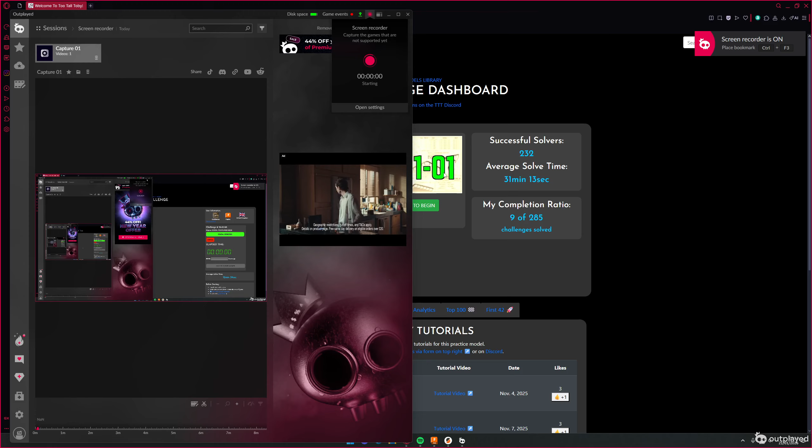Okay, this is my attempt at a tutorial, if it ever decides to load, for this part. Alright, I think I'm gonna start by modelling one side, mirror it over. I'm gonna start by doing this rail, then I'm going to do these tubes.

So I think this model was actually a tournament model, and I did try and do it a while ago, but I didn't get it right. So it says no Ivan exploits, which I don't think are allowed on leaderboard models or practice models anyway. But yeah, I'm going to start by modelling this line here.

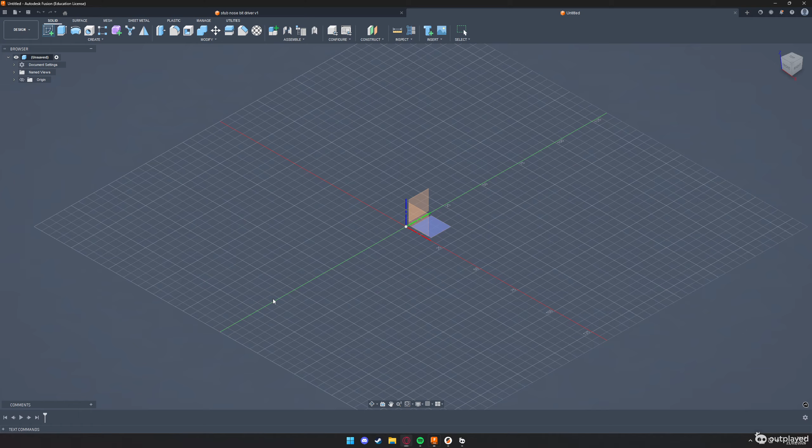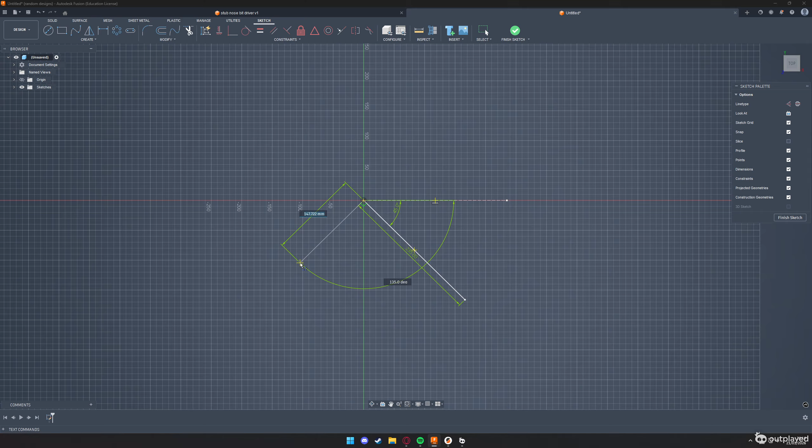So I start just having a line, and yep, that's 45 degrees from the centre, so it's going to be 45 degrees, and it is 235 long. 235. There we go. Now I can add another one at 90 degrees and add a fillet between here and here. And that fillet should be 26 because I'm modelling the outside diameter first.

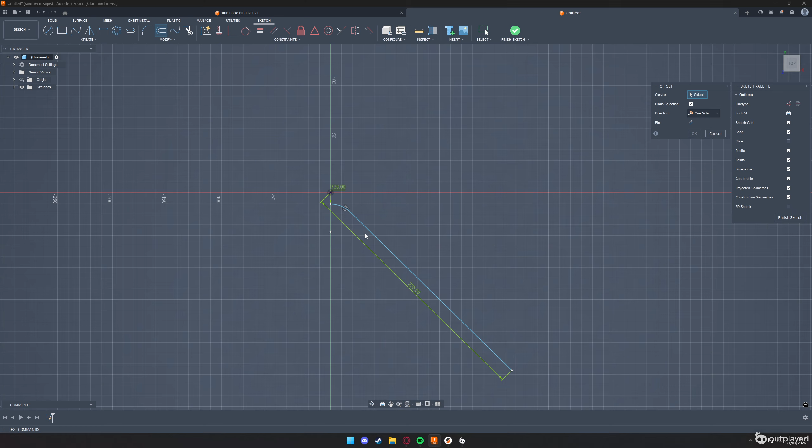Now I can make a line down here and just cut off all of this dirty stuff there. Right, that's the centre point, that's not going to go, is it? Okay. Now I want to move in. How thick is this part? 6mm. So I'm going to use the offset tool and go in by 6. And I'm going to close up this end and this end. This should be the sketch of this part modelled.

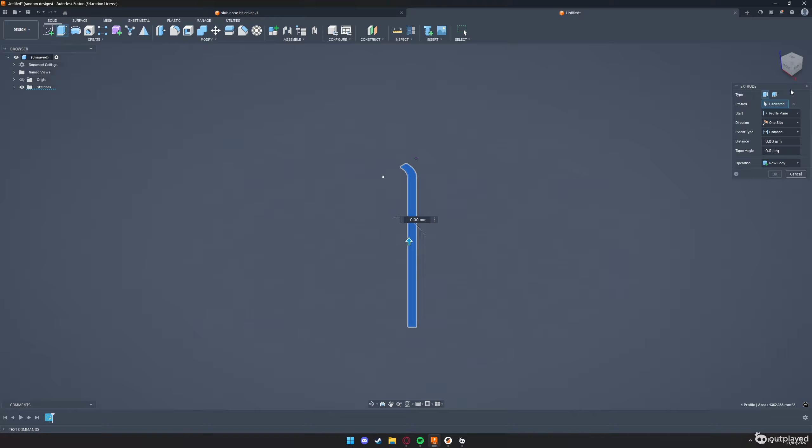I can now extrude this up. I don't like that about this model. The hole is directly in line with it. So how far up does that go? That goes up 10mm. Next I'm going to work on, I think, this bevel. It says there's a small flat spot here.

So the bevel, is it a bevel or the radius, whatever it is, I want to find out this point. It's a tangent from there, so it must be set slightly away. Where does it say what radius that is? There. So it's a 38mm radius. And does it say that it's set in? It's got to be set. No, it's got to be set out. 25. I'm going to assume that 25 is to the centre.

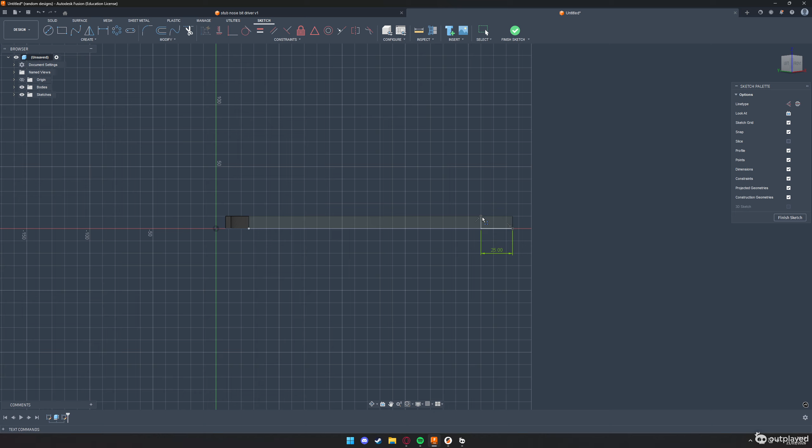So I'm going to create another sketch on there. We'll soon find out if that 25 is right. So 25 in. And then from the top of there, we want to go down. So 38 by 2 to give us the radius. Oh no, sorry, 38, because that is already a radius.

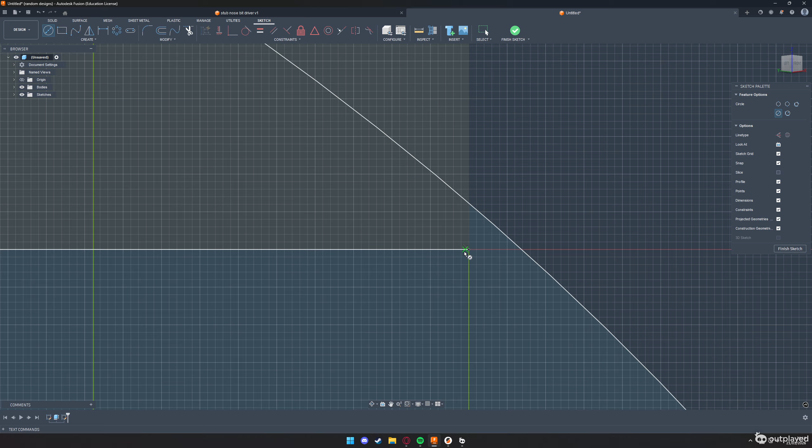I can go on to circle, and that should, yes, right, perfect. That gives us a little flat spot there, so I'm pretty sure that is correct. Don't want to go in, I want to go, well, what's happening there. There we go. Alright, now there are holes here and here. Expanded view here, so it's 4mm all the way through with a 45 degree chamfer and 8mm at the end. Although, yes, no Ivan exploits.

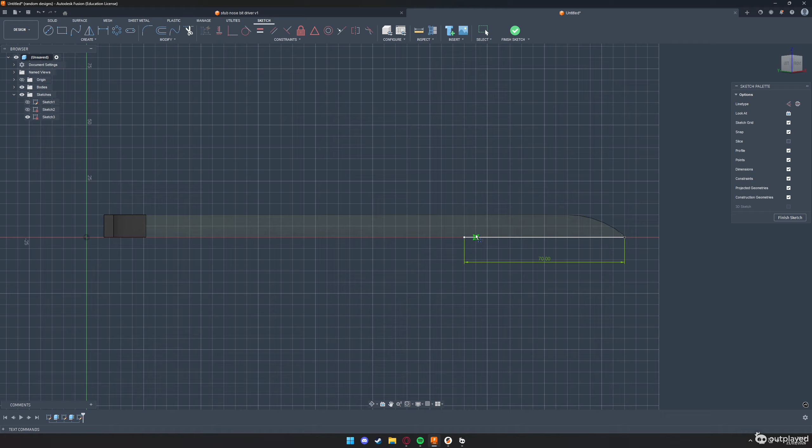So it gives us the dimension from the end, 70, and then between them is 70. So I can select a line, make that 70, and then I can select another line and make that another 70. You can see it already wants to snap to halfway, so I'm just going to do a circle at 4 millimeters diameter, and here a circle at 4 millimeters diameter.

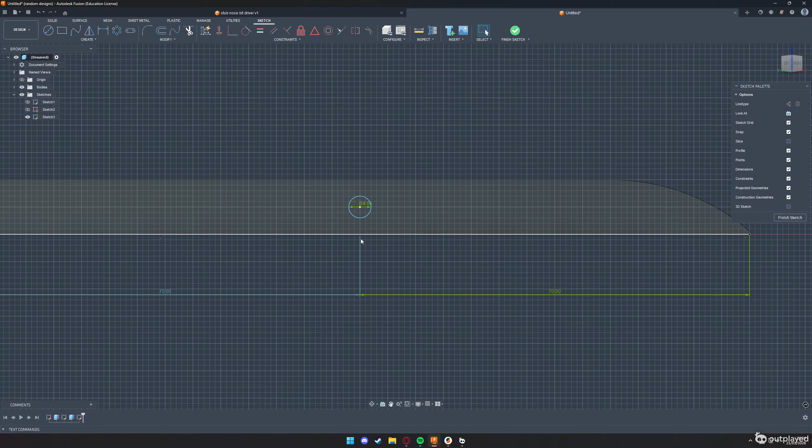To get it accurate, you want to draw a line up, but I can see where these two dimensions connect, and it's very clearly in the center. So select both of those, extrude them all the way through. Go back here, hide this sketch, and let's create a chamfer here. It automatically sets itself to 45 degrees, which would be 90 degrees between the two faces.

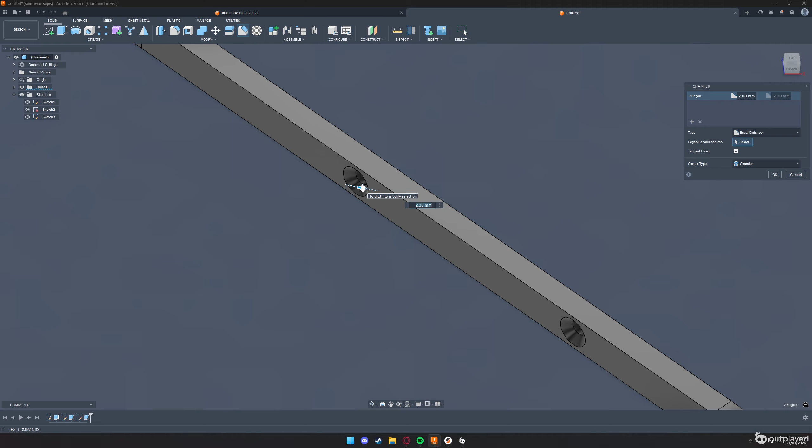And it's going from a 4mm hole to an 8 diameter. So 8 minus 4 is 4. Divided by 2, that's 2. So 2 is correct there. Now comes the hard part, which is actually making these, I don't know what to call them, the wires or rails between the things.

So we can see that it's from point to point here, not centre to centre, it's 22. From centre to centre it would be 22 plus the diameter of the wire, which is a 4mm diameter, 6 places, which are 6 wires, yep. So 26 from centre to centre.

So I'm going to start by setting up a plane on the bottom face at the center of this wire. Then I'm going to find how long the distance is between this part and this part on that plane. I'm then going to create a pattern using that spacing of 6, and I can then mirror them and it should be alright, I hope.

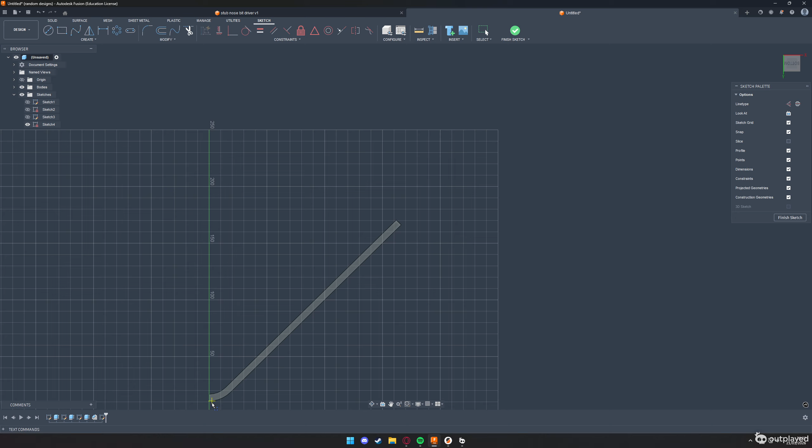So if I make a sketch on here, now it needs to tell me where at least one of these starts. Yes, so the 150 is from the very point of there to the outer edge of the first wire. So if I do 150, and then I want to go in for the 4mm wire, so I want to go in half the diameter of that, which is 2.

I can then go, yeah, that snapped. I want to go out all the way past there, so it intersects both of these lines. And it is halfway, isn't it? 2mm to wire center, and just check that is 6. Yeah, that is 6. So now I can draw another line, letting it snap on this point where these two lines intersect, and this point where these two lines intersect.

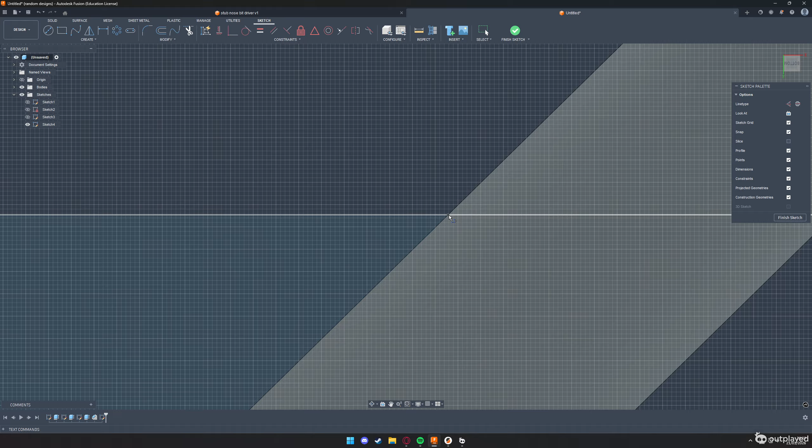Now I can do this because I'm sketching on this face. I can now make a circle here at 4mm diameter of the wire. Do I want to do that? Yes, I do.

So now I want to go down because it doesn't give me the dimension from here to here as this angle. It instead gives me from end to end 22. So I want to go down 26, which is 22 plus the 4mm. So 26mm down, make sure that snaps to 90.

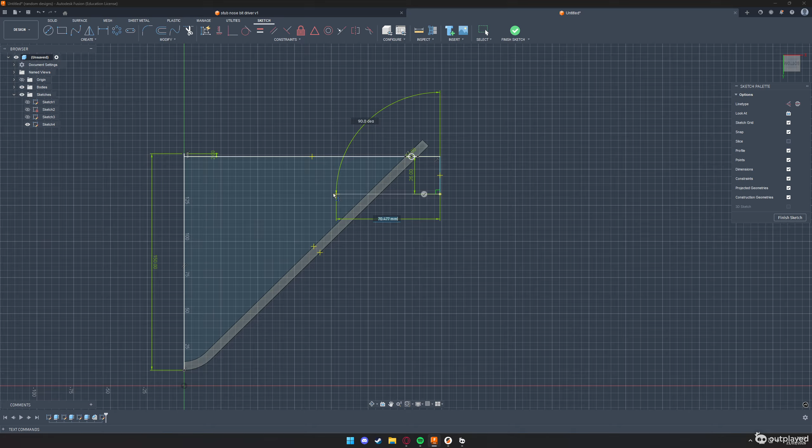And we're going to do the same again, letting it snap to the ends. And let's make a circle here of 4mm. It's snapping to the center of the intersect.

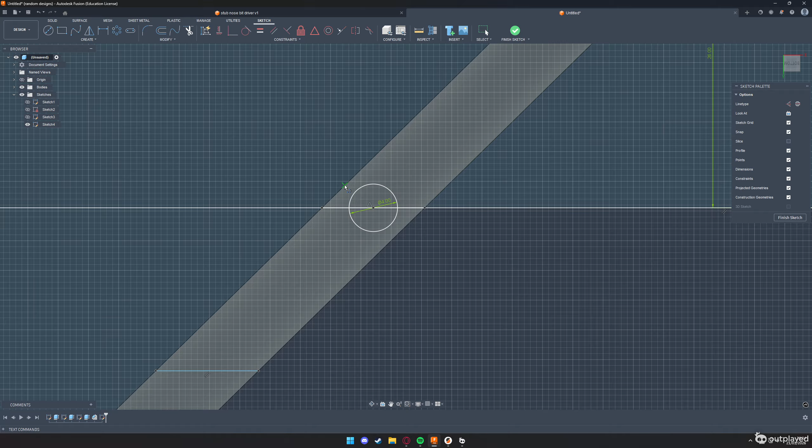Right, so the intersect that I've done automatically has a center point, which is identified by that triangle next to the cross. So the reason I'm doing these to intersect these two is to give me the center instead of trying to figure out a way of doing 2mm in, snapping it to 90, then doing 90 across again, which will give me the same centre. This is just a little bit quicker.

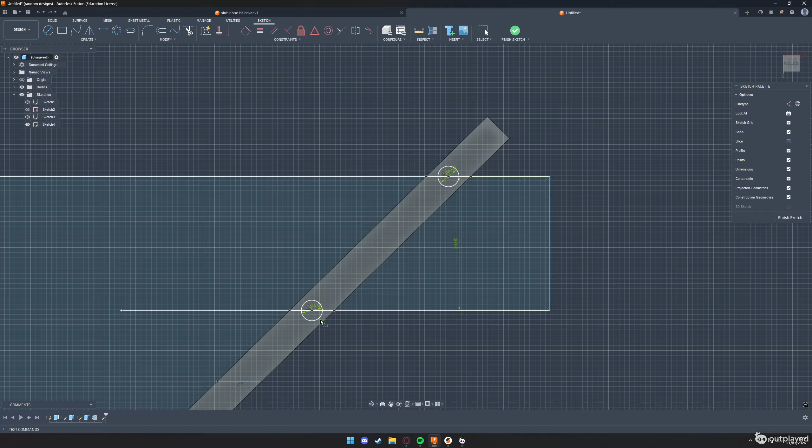Okay, so I can finish that now. Oh, I don't want to finish that sketch just yet because I want to copy the centre of the hole position.

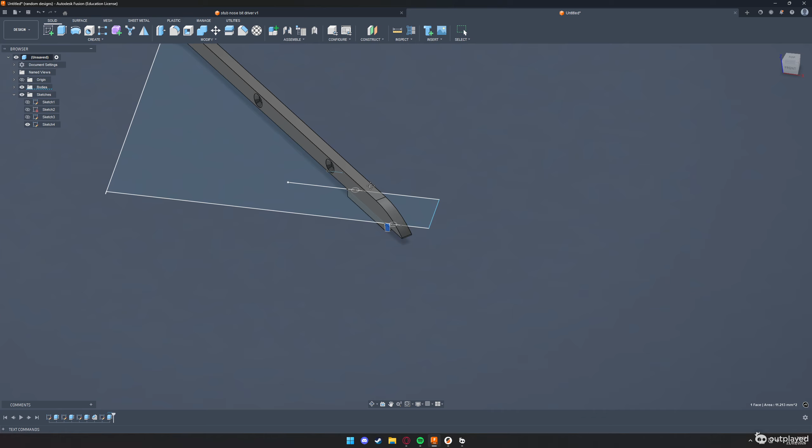36.770, copy that. Now if I extrude this down, I'm only extruding this to give me this face here, which is the starting point. I could do it as a plane moving from the back, but because my origin point is actually set at the intersect of this line and the line that would be going the other way, not on this point, 150 would be annoying to calculate.

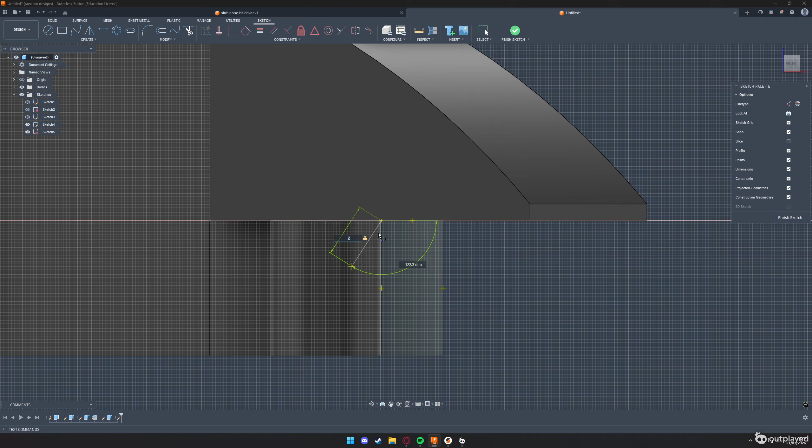So I can create a sketch on this plane. It's not going to want to snap to here, but that's fine, because I can simply go 2 in from the edge of this plane, which it does want to snap to. I can then go down. Where does it say how deep these are? Right, so they're down by 30.

Yep, and then I'm just going to go across all the way to the center point, which does want to snap.

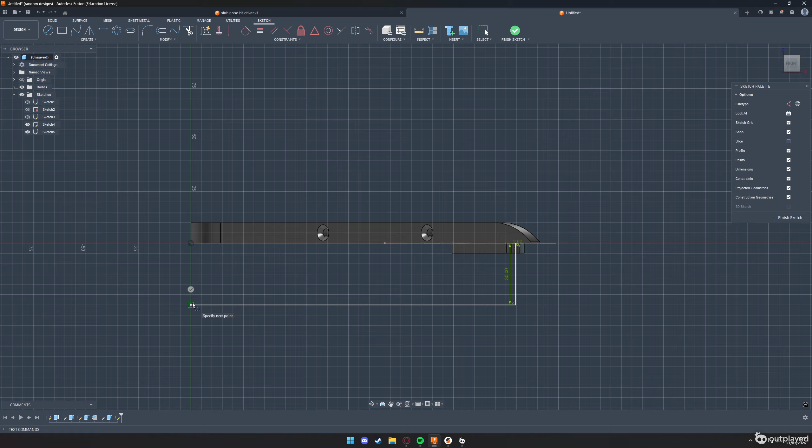I now want to produce a fillet here, and I want this fillet to be the center of this curve, not the inside or the outside. So the inside is 8 and the outside is 12, so halfway between that is 10. So I want this to be a 10mm fillet, or a 10mm radius fillet.

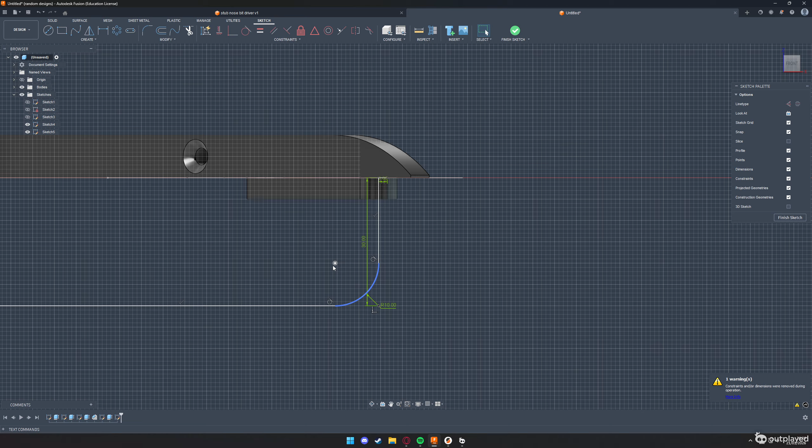That should give me, that looks about right, that should give me enough so I can finish this sketch. I can get rid of this plane, so just cut it away to this face.

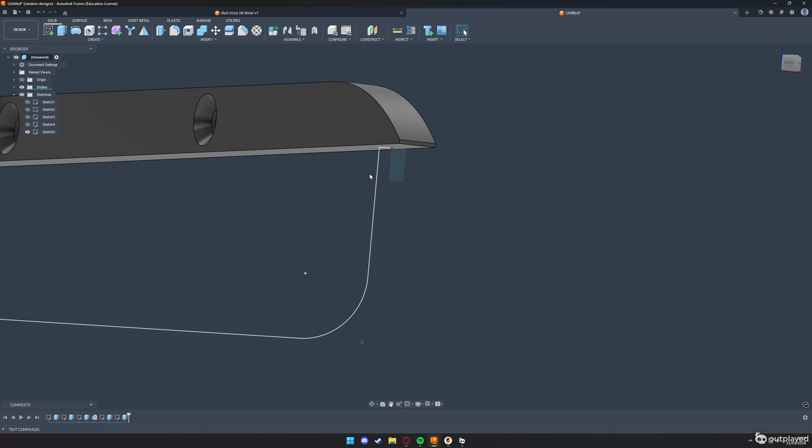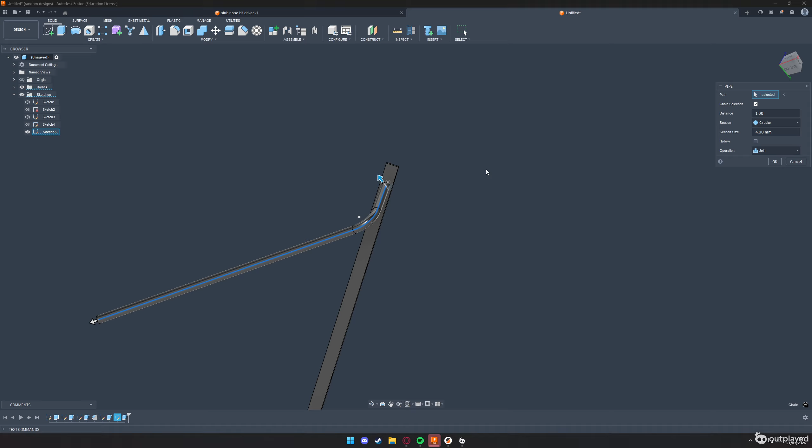Right, now I want to delete this little bit there, because when I make my pipe, that will automatically select. So make my pipe on here, that's already full, lovely. I want to make sure that it is a new body, because if you notice, the rails and the holder are not the same material. So new body and click OK.

This will also let me use a pattern, and I can select this whole body instead of having to select the individual faces.

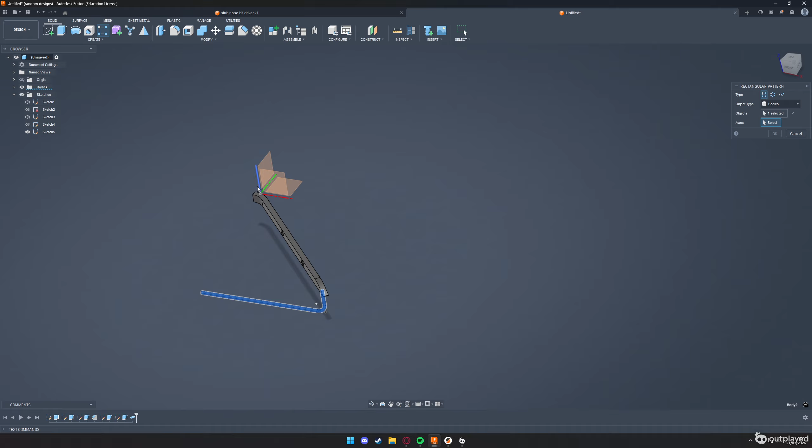Now I'm going to do my pattern. So I want a rectangular pattern, and I'm going to select this body, and for the axis I'm going to select this line, or any of these lines really will work, going 90 degrees to the center. I want to select a spacing, and the quantity of objects I create is going to be the number of rails. So 1, 2, 3, 4, 5, 6.

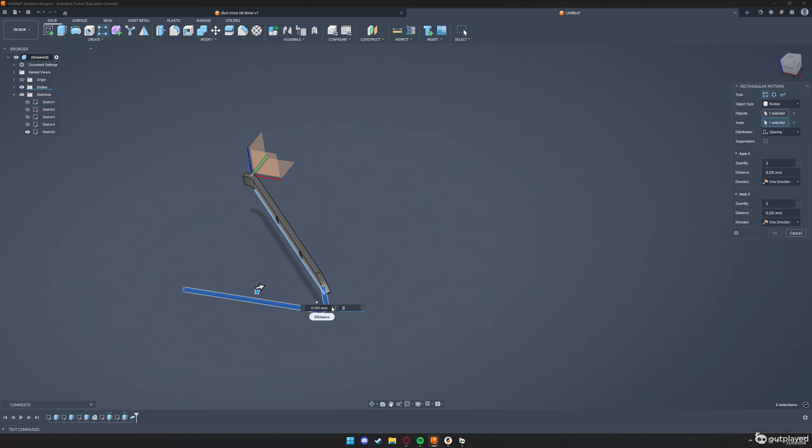So 6, and then the number we copied earlier I'm going to paste into here. Now this is going the wrong way, so I'm just going to add a minus symbol before that. One direction, yep, perfect.

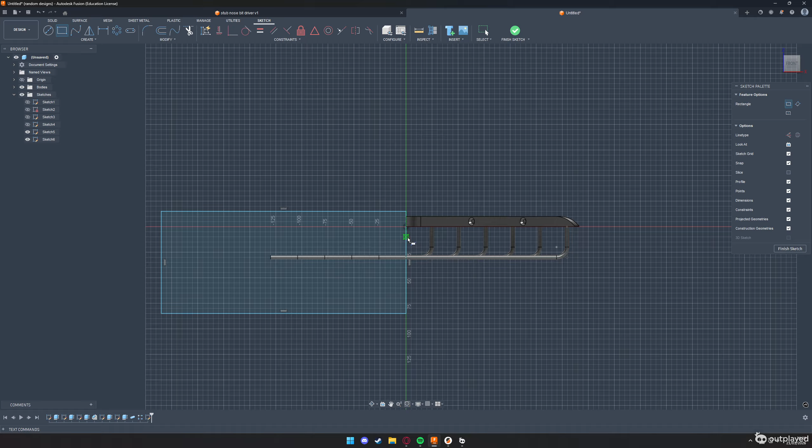And that is one side, almost done. I'm just going to create a quick sketch here. Doesn't matter what the shape is, as long as you've got this line going down the center, because I'm going to extrude this all the way back, which will cut these nice in the middle.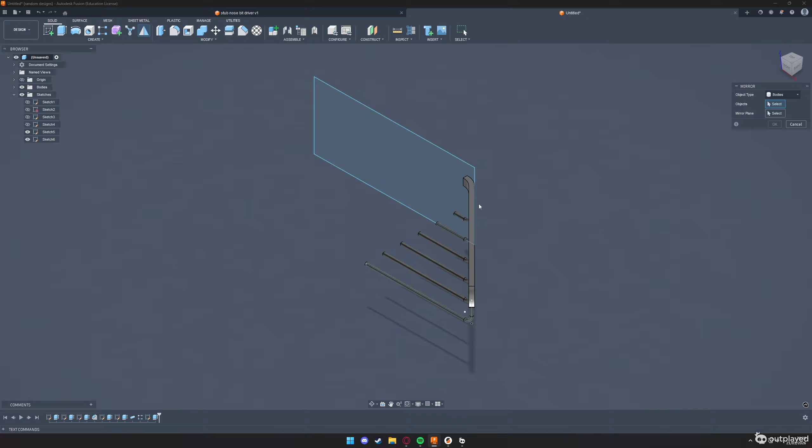Now I can create a mirror, select the bodies. I don't want to select features, I want bodies. This one, all of these. And for the plane, I want it to mirror around this edge. So I could select this, but just in case I've done anything wrong, I'm going to select this plane.

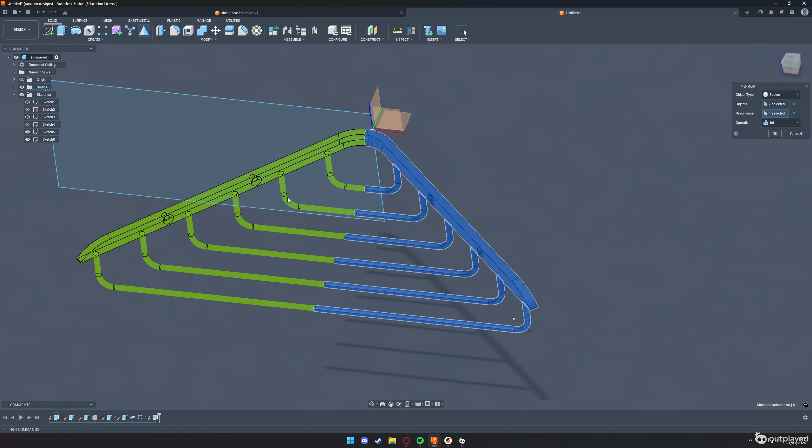Click. Now it's join. This doesn't mean it's going to join everything it's made. This means it's going to join only the faces of the individual bodies that are touching. So this face will join these two bodies. This face will join these two. This face will join these two, and so on. So if I click OK, you notice these are all the same body.

If I go to bodies, I still have my top and then my rails. This should be the whole thing complete. Now I've just got to add my masses.

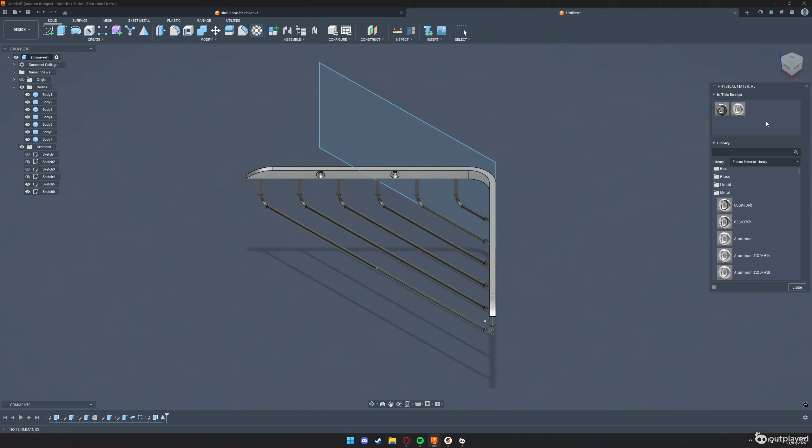So it's aluminium, isn't it? The wires are. Right, so number 1. So this is aluminium. Let's make sure I've got the right mass, which it is. Apply, cancel. And then the rest should be steel.

Don't know, no, there. Let's make sure that's right. It is not. So let's change that to 78. Apply. Is it going to give me an error? Normally it gives me an error. I'll just make sure that's, yeah, that has saved.

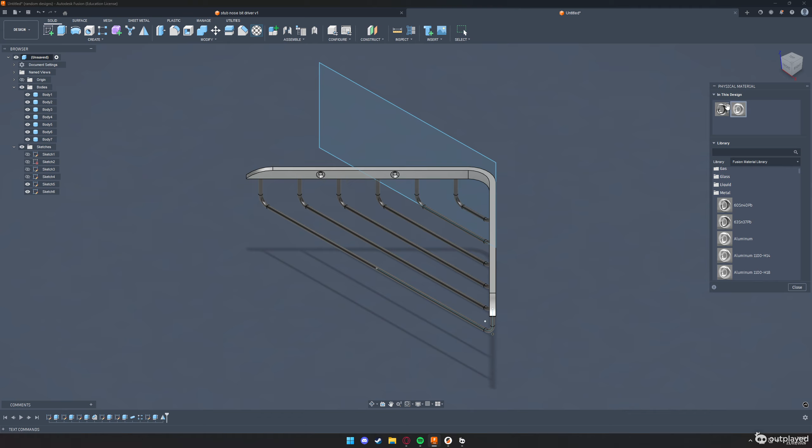And I'll make double sure that every single one of these is covered in that, just in case Fusion has decided to not play along. That was aluminium. There we go.

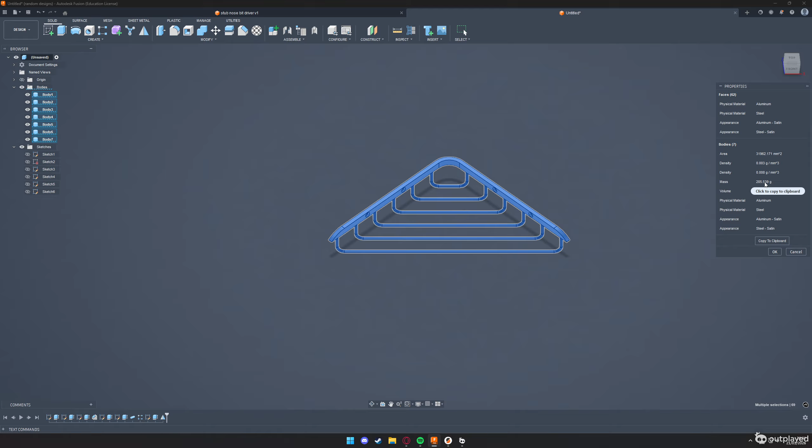Right, I can close that. Now, hide that sketch because that's ugly. If I do properties, we're giving 205.539 grams. Please be correct, because I'll look like an idiot if it's not.

Alright, what have I missed? So I've missed something. Right, it's got to be the depth of these, I reckon. Yes, that's coming as 42.

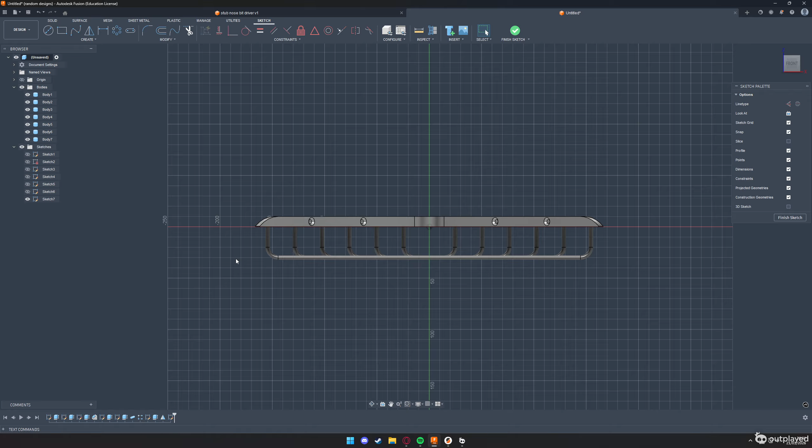So, what I've done, I've inputted an incorrect number for something to do with this angle, I reckon, where I've not accounted for... okay, so I haven't accounted. What I've done, I've made the sketch go all the way down here, and then I've had it across there.

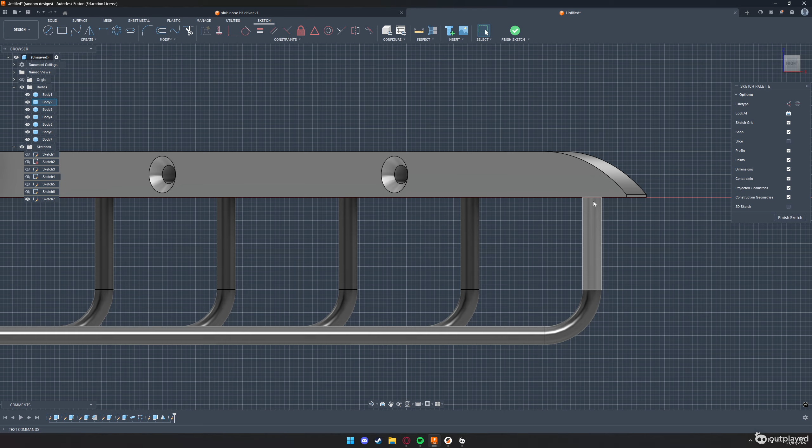Instead of using, because in the drawing, let's see, yes, it gives a distance of 30 from the top of there to the bottom of there. I've done a distance of 30 from the top of there to the middle of here. But it's easy to fix, because I know how much I'm off by.

I can simply make a rectangle here, set the distance as 2, finish that. Now I can move this all the way back to cut those.

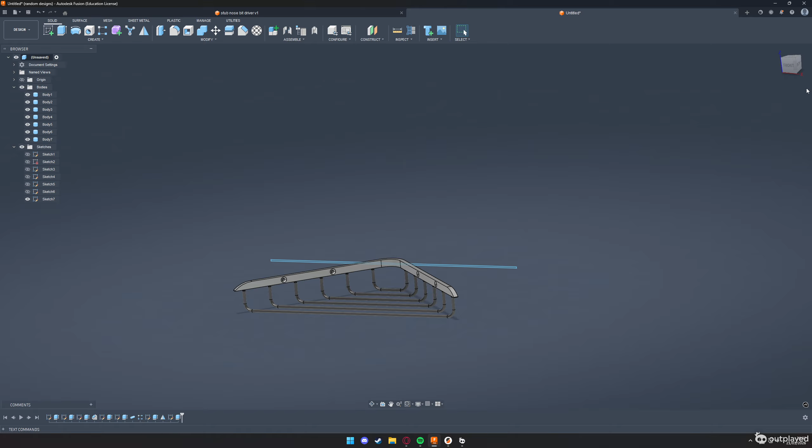Now to get the right mass, I don't need to move these up, but it'll look a lot better. So that's going to snap to 5, isn't it? Right, so let's move that back to 2, enter.

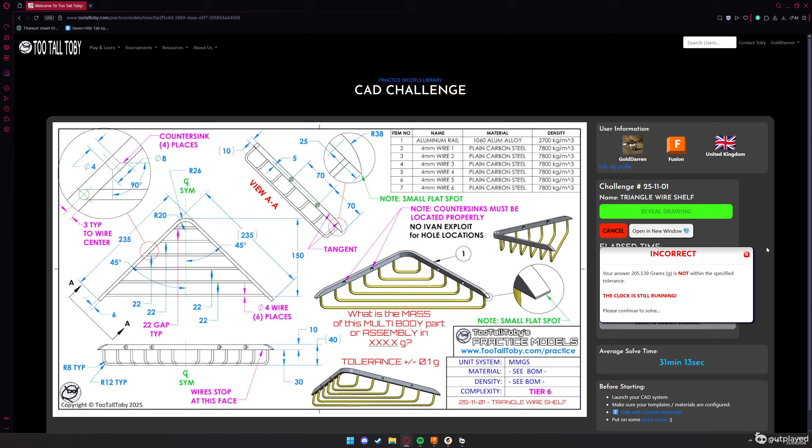Now when I select all of these, properties, 203.187. Please let that be right, and that is right. So yeah.